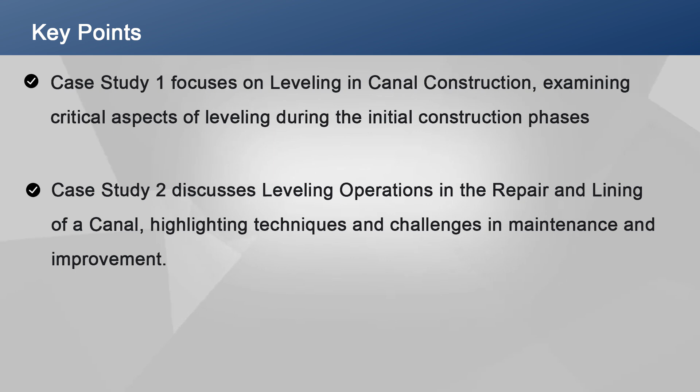The first case study focuses on leveling in canal construction, examining critical aspects of leveling required during the initial phases of construction. The second case study discusses leveling operation in the repair and lining of a canal, highlighting techniques and challenges faced during maintenance and improvement of existing canals. Following these case studies, we will work through an example problem for calculation of earthwork to further understand the practical application of these leveling techniques.

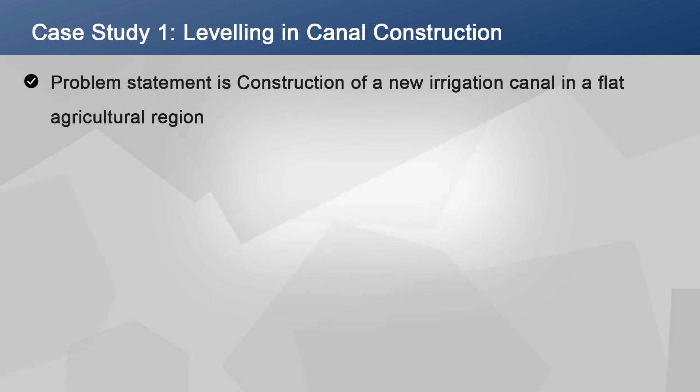Let us start our discussion with case study number 1, leveling in canal construction. What is the problem statement and the objective? The problem statement is construction of a new irrigation canal in a flat agricultural region. The objective is to ensure uniform water flow by maintaining a consistent canal bed slope through precise leveling.

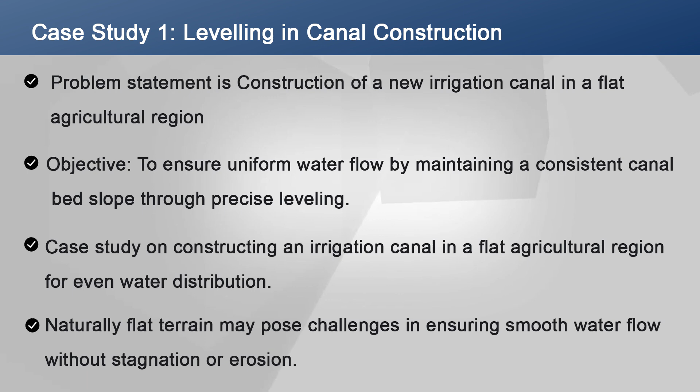In this case study, in a flat agricultural region, an irrigation canal is being constructed to distribute water evenly across farmlands. But if the terrain is naturally flat, it may pose a challenge in ensuring the water flows smoothly without stagnation or erosion. Proper leveling is critical in achieving the desired canal bed slope, necessary for efficient water distribution.

I will repeat this because it is a very important point. Proper leveling is critical in achieving the desired canal bed slope, because if the canal bed slope is not appropriate, water will not flow smoothly.

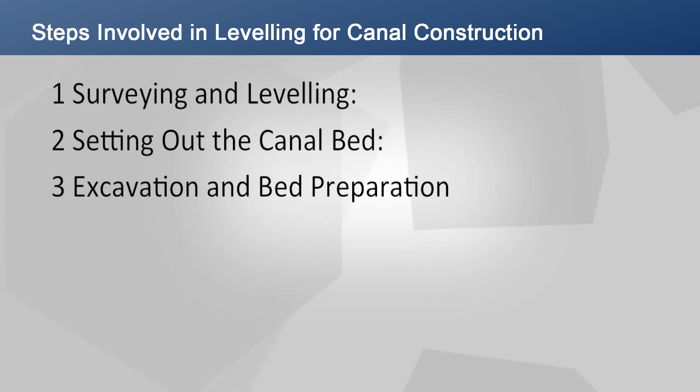What are the steps involved in leveling for canal construction? The first step is surveying and leveling. The second step is setting out the canal bed, and the third step is excavation and bed preparation. We are going to discuss each step one by one.

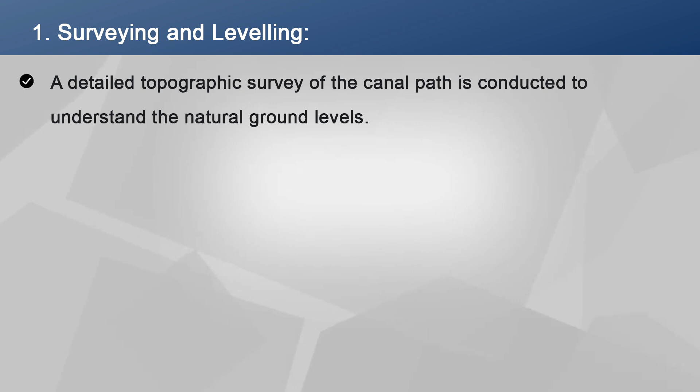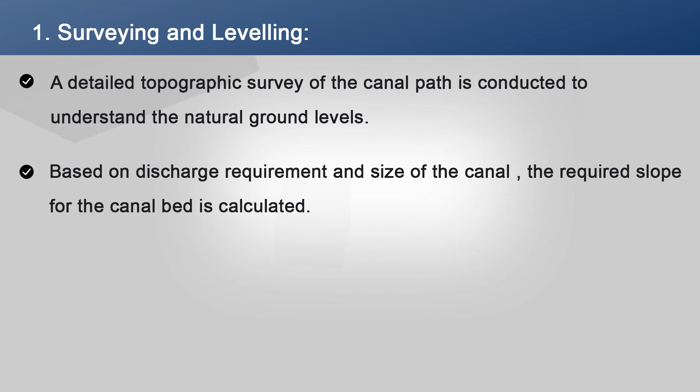The first step is surveying and leveling. A detailed topographic survey of the canal path is conducted to understand the natural ground level, meaning existing ground levels are recorded. Based on discharge requirement and size of the canal, the required slope for the canal bed is calculated.

For example, a gentle slope of 1:2000, which is equal to 0.05%, is often used to ensure the water flows at an optimal speed without causing erosion or silting.

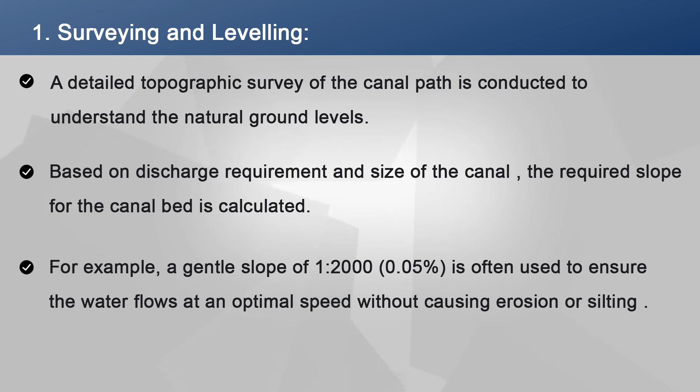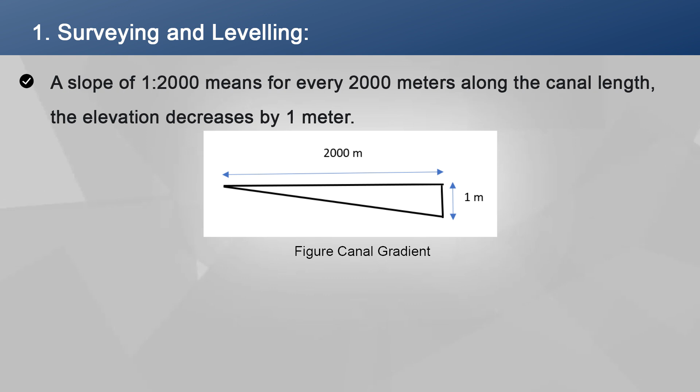So what do you understand by a slope of 1:2000? It means for every 2000 meters along the canal length, the elevation decreases by 1 meter. This downward slope is essential because water naturally flows from a higher level to a lower level. Without this gradient, the water would not flow effectively through the canal.

In mild slope, silting can occur where sediment settles and accumulates in the canal. On the other hand, if water flows at high speed due to a steeper slope, scouring can take place, which can erode the canal bed as well as the bank.

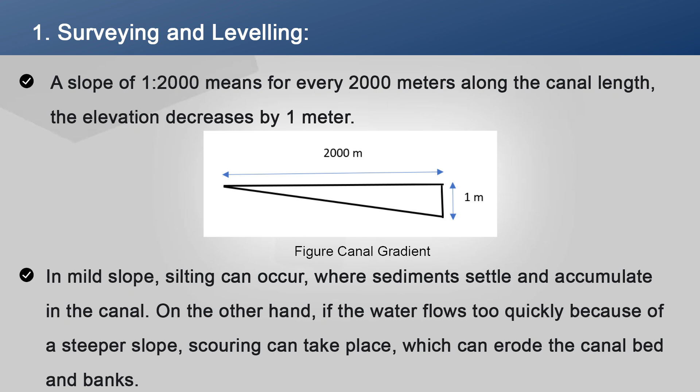You may find silting and scouring to be new terms, so let us take a moment to discuss them. The first term is silting. What is silting? Silting occurs when small particles like sand, silt or mud settle at the bottom of a canal. Over time, these particles pile up, reducing the depth of water and sometimes blocking the flow. You can understand silting by this figure.

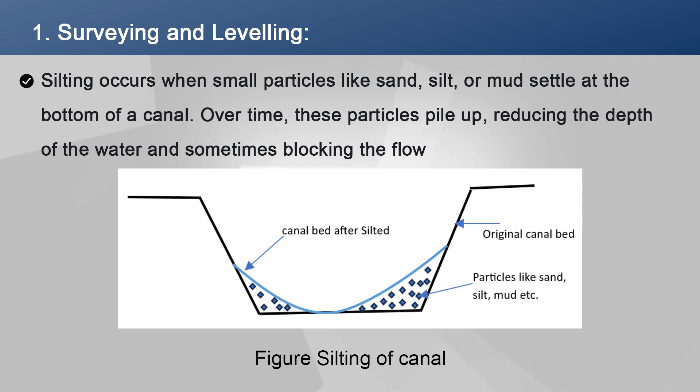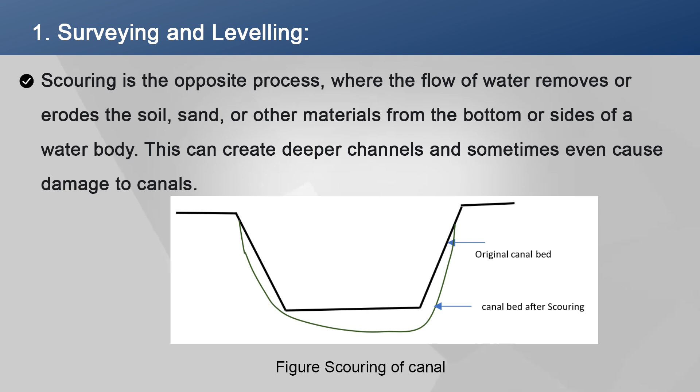Now, what is scouring? Scouring is the opposite phenomenon, where flow of water removes or erodes the soil, sand or other material from the bottom or sides of a water body. This can create a deeper channel and sometimes even cause damage to the canals. You can understand this with this figure.

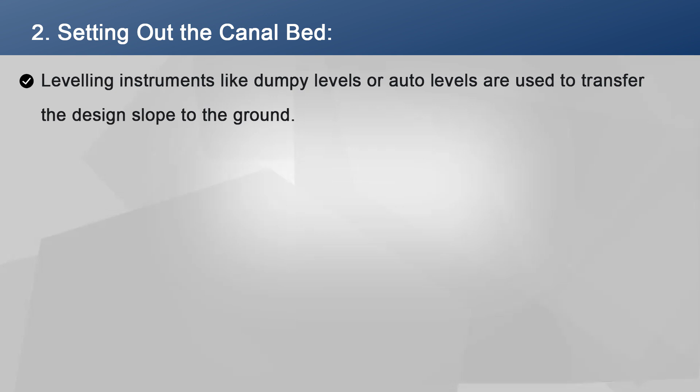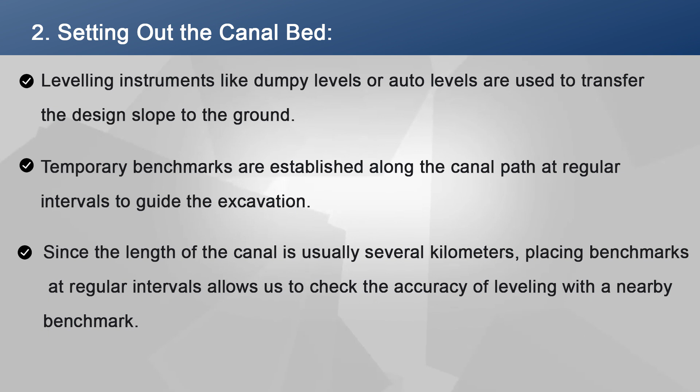Now, the second step is setting out the canal bed. Leveling instruments like dumpy level or auto level are used to transfer the design slope to the ground. Temporary benchmarks are established along the canal path at regular intervals to guide the excavation. Since the length of the canal is usually several kilometers, placing benchmarks at regular intervals allows us to check the accuracy of leveling with a nearby benchmark. This eliminates the need to return to the first benchmark repeatedly.

Now, step number 3 is excavation and bed preparation. The excavation is carried out following level markings given using instruments like auto level and dumpy level, ensuring the canal bed maintains the uniform design slope. This means one person generally keeps instructing the person driving the JCB up to which level excavation is supposed to be done, so that uniform slope of the canal can be maintained.

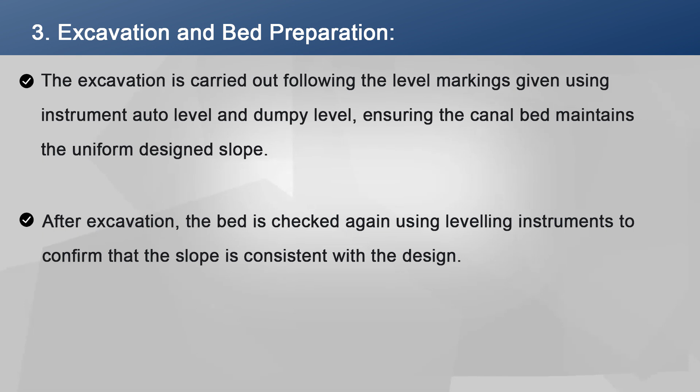After the excavation, the bed is checked again using a leveling instrument to confirm that the slope is consistent with the design. Now we will discuss the importance of precise leveling.

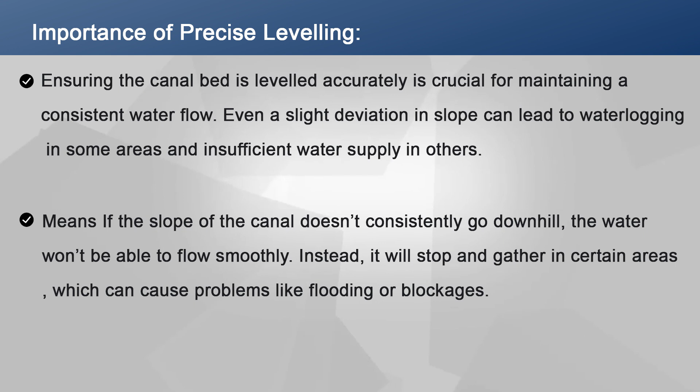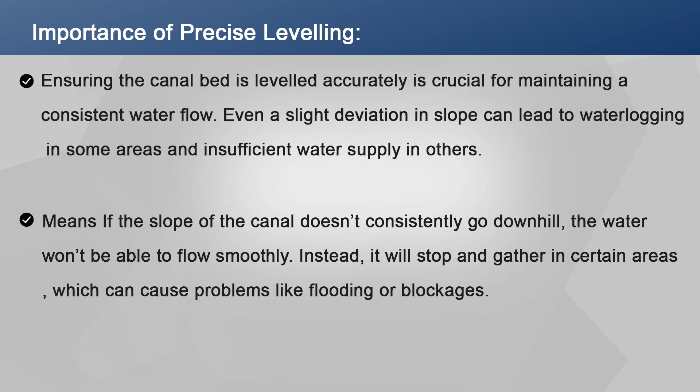Ensuring the canal bed is leveled accurately is crucial for maintaining a consistent water flow. Even a slight deviation in slope can lead to waterlogging in some areas or insufficient water supply in others. If the slope of the canal does not consistently go downhill, the water won't flow smoothly. Instead, it will stop and gather in certain areas, causing problems like flooding or blockages. This is why it is crucial to ensure the slope is uniform throughout the entire canal.

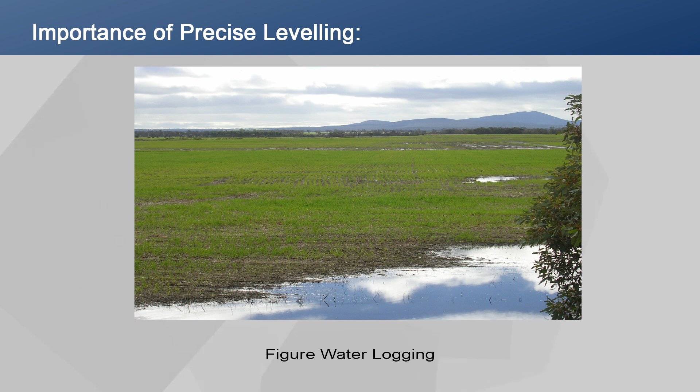Precise leveling also minimizes the risk of erosion, which can weaken the canal structure and lead to costly repairs. If the slope becomes steeper, water will flow at very high velocity and erode the soil.

So after discussing this, what is the outcome of this case study? In this case, the proper application of leveling techniques during construction of the canal ensured that water was distributed evenly across the farmland, improving crop yield and reducing the risk of erosion.

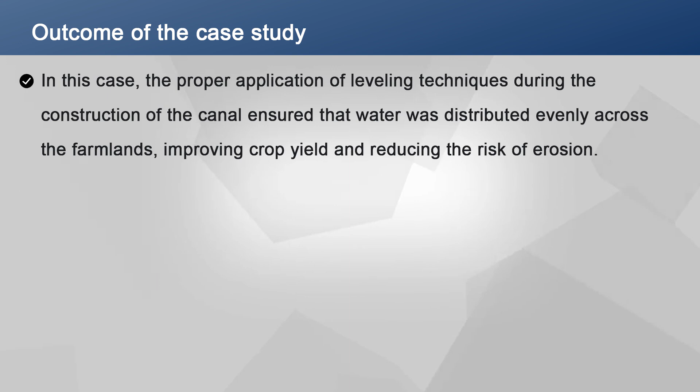Now we are going to discuss case study number 2. What is the problem statement? It is the leveling operation in the repair and lining of a canal. We want to perform repair and lining of an existing canal suffering from water seepage and uneven flow.

What do you understand by lining? Lining of a canal refers to the process of covering the bed and sides of a canal with a protective layer like concrete. You can see in this figure, it is a figure of a lined canal.

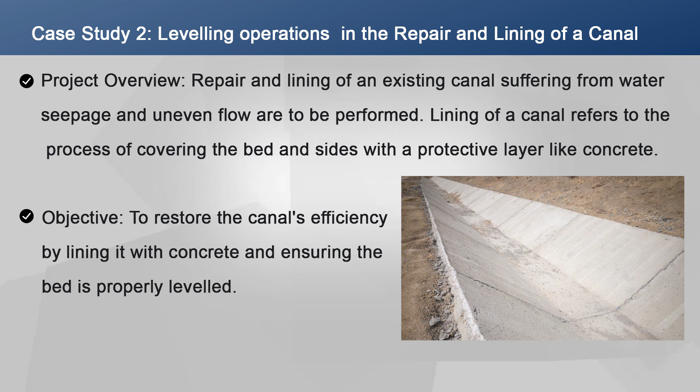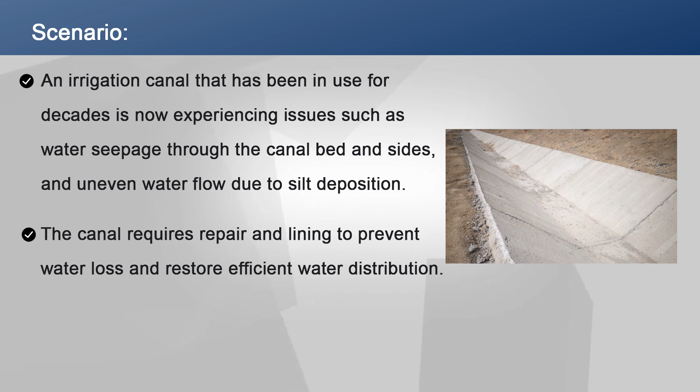What is our objective? Our objective is to restore the canal's efficiency by lining it with concrete and ensuring the bed is properly leveled. Here, an irrigation canal that has been in use for decades is now experiencing issues such as water seepage through the canal bed and sides, and uneven water flow due to silt deposition. The canal requires repair and lining to prevent water loss and restore efficient water distribution.

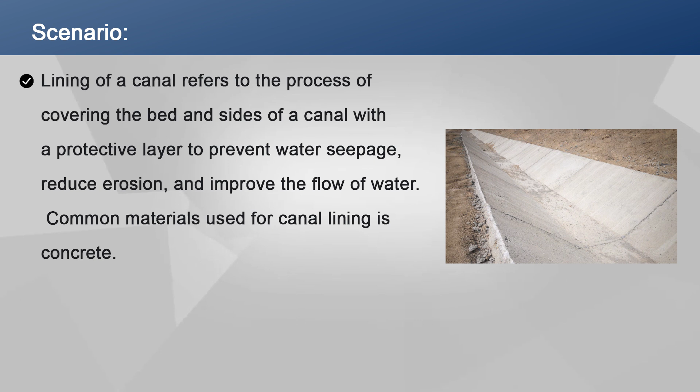Now I want to again highlight the lining of the canal, because this is a very important term in canal repair. Lining of a canal refers to the process of covering the bed and sides of a canal with a protective layer to prevent water seepage, reduce erosion, and improve the flow of water. A common material used for canal lining is concrete.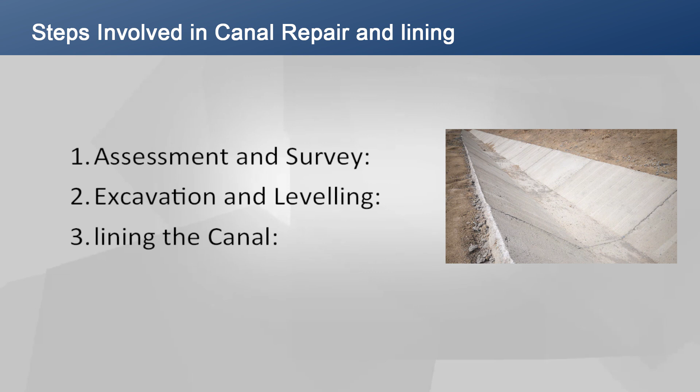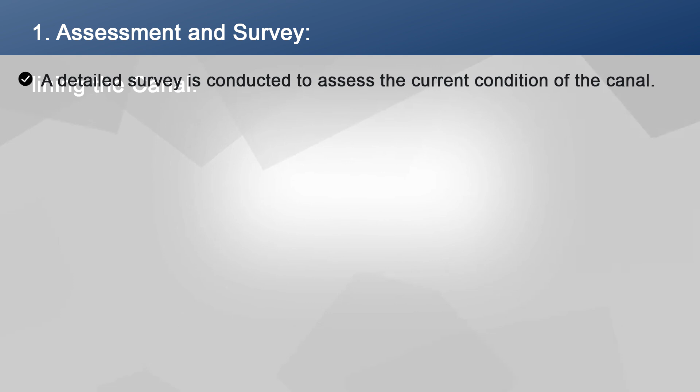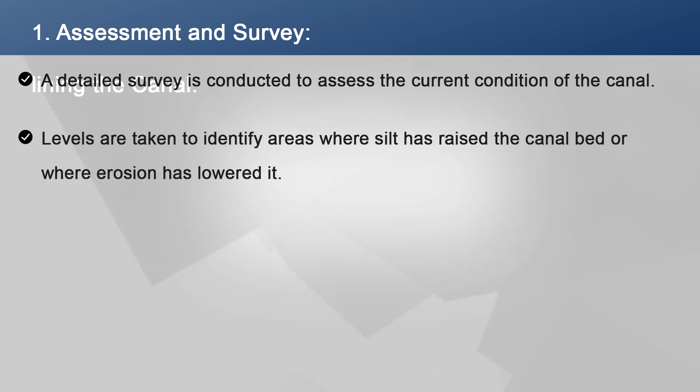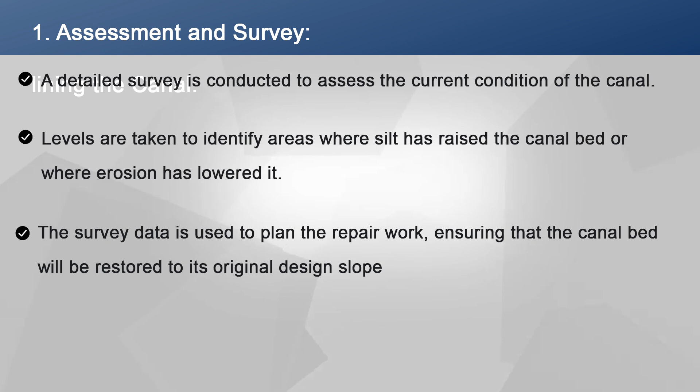Let us discuss the first step: assessment and survey. A detailed survey is conducted to assess the current condition of the canal. Levels are taken to identify areas where silt has raised the canal bed or where erosion has lowered it. The survey data is used to plan the repair work, ensuring the canal bed will be restored to its original design.

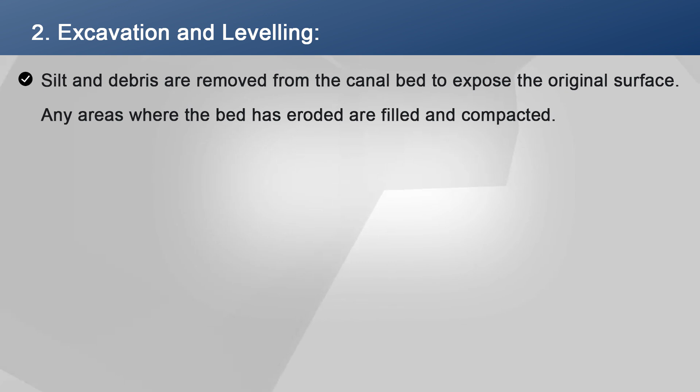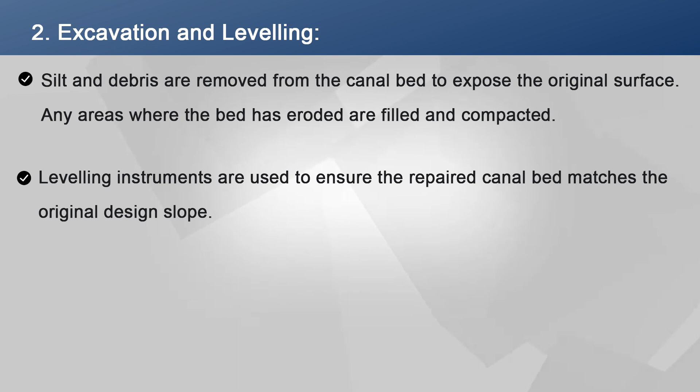The next step is excavation and leveling. Silt and debris are removed from the canal bed to expose the original surface. Any areas where the bed has eroded are filled and compacted. Leveling instruments are used to ensure the repaired canal bed matches the original design slope, which may be like 1:2000 or 1:3000.

Lining the canal: the canal is lined with concrete or other impermeable material to prevent seepage. The lining is applied uniformly following the leveled bed to maintain the desired slope. Regular checks with leveling instruments like auto level and dumpy level ensure that the lining does not alter the canal slope, maintaining consistent water flow.

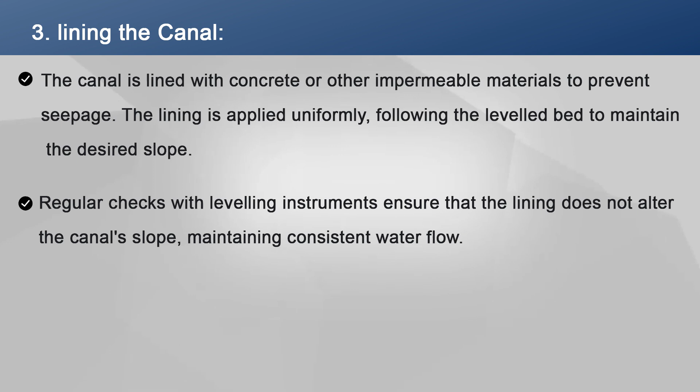Now we will discuss the importance of leveling in lining. Precise leveling during lining ensures the canal retains its design slope, preventing problems such as uneven water distribution or excessive flow velocity that could damage the lining. Leveling also ensures lining is applied evenly, preventing weak spots that could lead to future leaks.

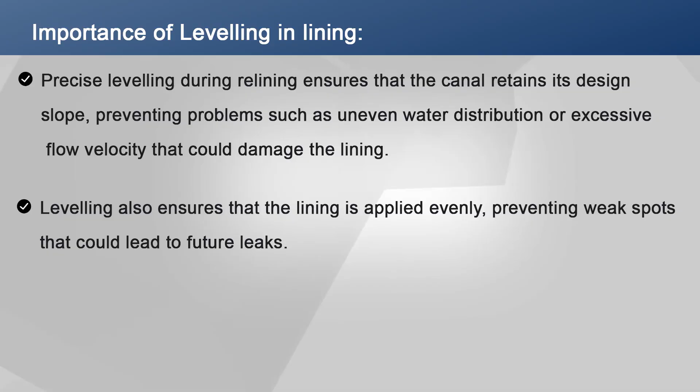So what is the outcome of this case study? By properly leveling the canal bed before and during lining, the canal's efficiency, which had become lower due to seepage and other problems, was restored. Water seepage problems were minimized and water flow became more consistent, leading to better irrigation and reduced maintenance.

So what is the conclusion of this case study? These case studies illustrate the critical role that leveling plays in both the construction and repair of canals. Proper leveling ensures that the canal functions efficiently, with water flowing at the desired speed and distribution, minimizing issues like erosion, seepage, and uneven water delivery. By using leveling techniques accurately, engineers can ensure the longevity and effectiveness of the canal system.

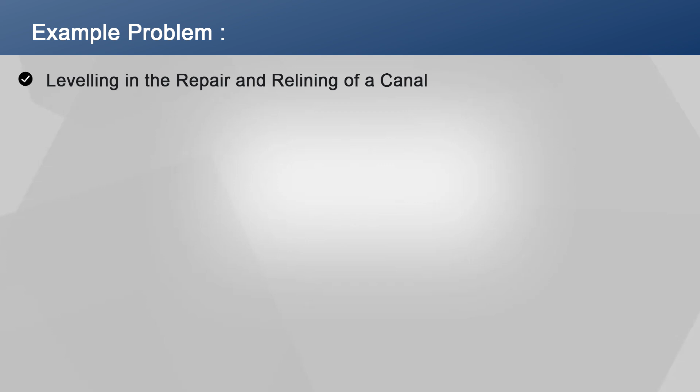Now we are going to discuss an example problem, which is leveling in repair and relining of a canal.

So, what is the problem statement? The problem statement is repair and lining of a 500-meter section of an existing irrigation canal with a bed width of 2 meters. The canal was originally designed with a gentle slope of 0.05%.

Now, what is the objective? The objective is to restore canal efficiency by ensuring the canal bed is leveled correctly and lining it with concrete to prevent the seepage problem.

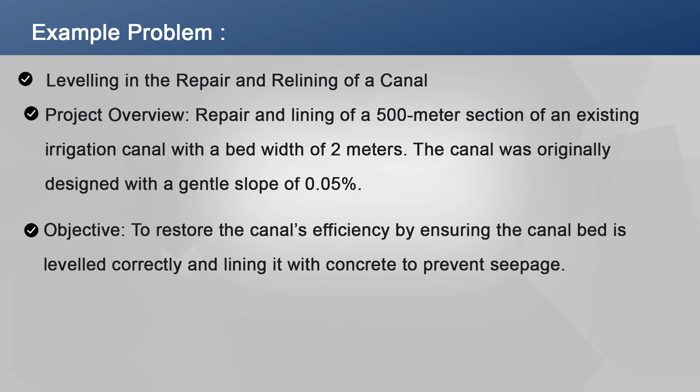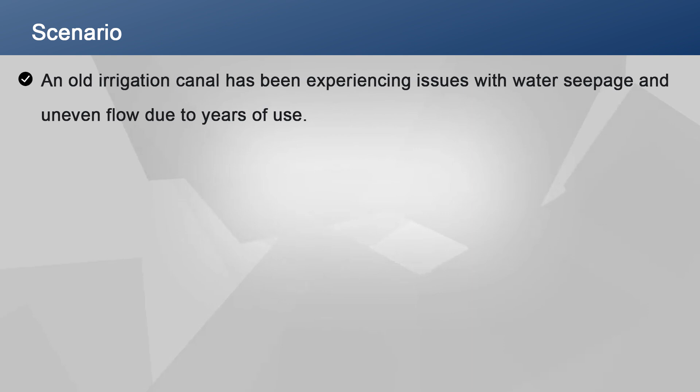The scenario is an old irrigation canal has been experiencing issues with water seepage and uneven flow due to years of use. The canal bed has accumulated silt in some areas, causing an uneven slope, while erosion has worn away the soil, creating uneven areas where ground has sunken, forming low spots in others.

Now, what is our goal here? Our goal is to re-level the canal bed and line it with concrete to restore its original functionality.

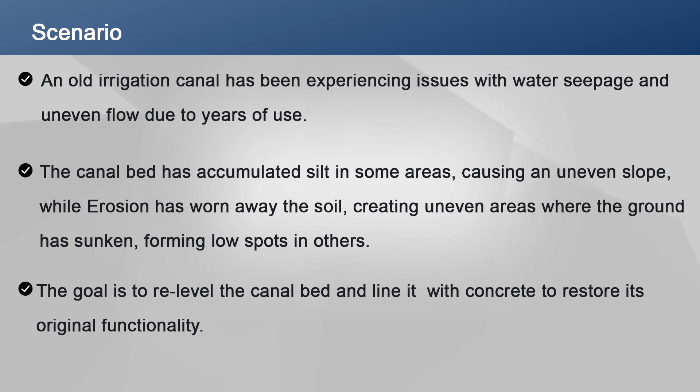We will deal with this case study step by step. First is assessment and survey. Second is excavation and leveling. Third is volume of earthwork calculation. Fourth is lining the canal, and fifth is final checks and leveling.

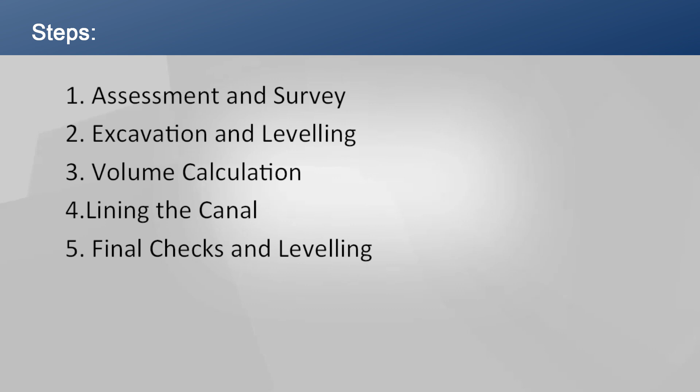So, what is the original design slope? The canal was originally designed with a gentle slope of 0.05%, which means 0.0005 meter per meter. What does it denote? It means for every 100 meter length of the canal bed, elevation drops by 0.05 meter, or we can say 5 centimeter, as you can see in this figure.

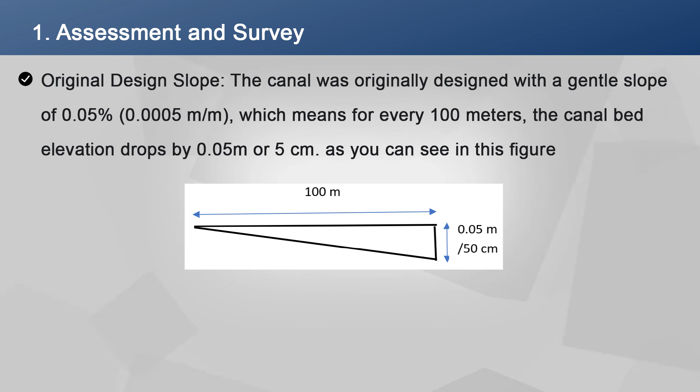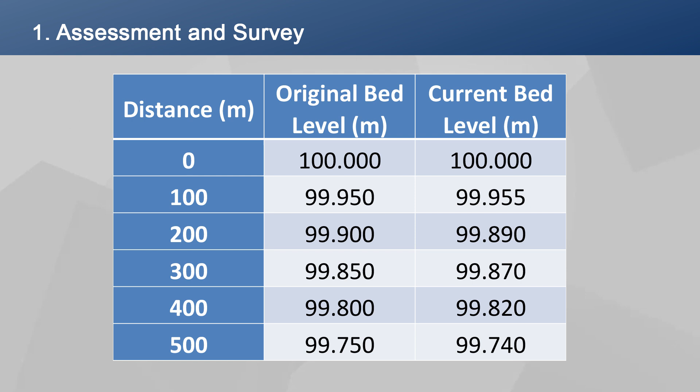Second step is excavation and leveling. Based on the survey data as shown in the table, the following observations can be made. At the 0 meter section, original bed level and current bed level are same, so there is no cutting or filling required, whereas at the 100 meter section, the current bed is slightly higher than the design level.

By 0.005 meters. At the 200 meter section, the actual bed is lower than design level by 0.01 meter or 10 mm. So, it needs to be filled and compacted to raise it to the design level.

What is the observation at the 300 meter section? The bed is slightly higher by 0.02 meter or 20 mm, requiring cutting to reach the design level. What is the observation at 400 meter? The bed is higher by 0.02 meter or 20 mm, requiring cutting to reach the design level.

What is the observation at the 500 meter section? The bed level is 0.01 meter below the design level, requiring a small amount of fill.

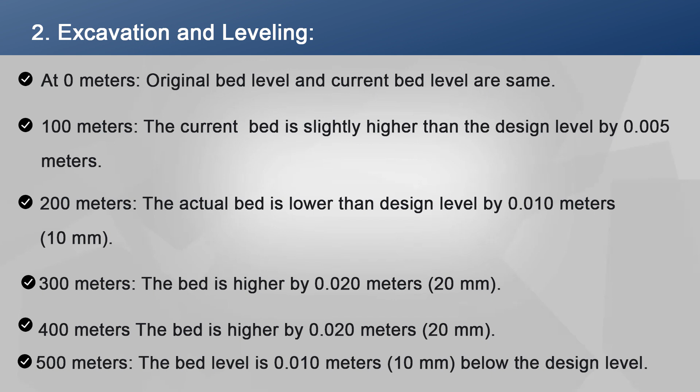Now, in the calculation of earthwork for this canal, we must understand the basic assumption. It is assumed that the cross section of the canal remains the same for half of the distance between each pair of sections on either side of the section being analyzed. I will repeat, because this is a very important assumption: the cross sectional area of the canal remains the same for half the distance between each pair of sections on either side of the section being analyzed.

This assumption helps in calculating the volume of earthwork needed. If you are finding it difficult to understand, this figure may help clarify the concept. In this case, the canal is 500 meters long and cross section details, meaning current bed level, are available at every 100 meters, which means bed level data is available at a total of 6 points along the canal length. We assume that the canal's cross section shape stays the same for half the distance between each pair of sections on both sides.

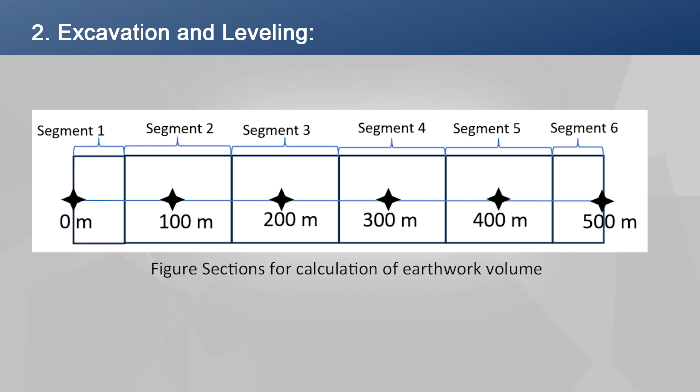Now, we will discuss volume calculations. Here, for the volume calculation, width of the canal bed is required, so it is given that the canal bed is 2 meters wide.

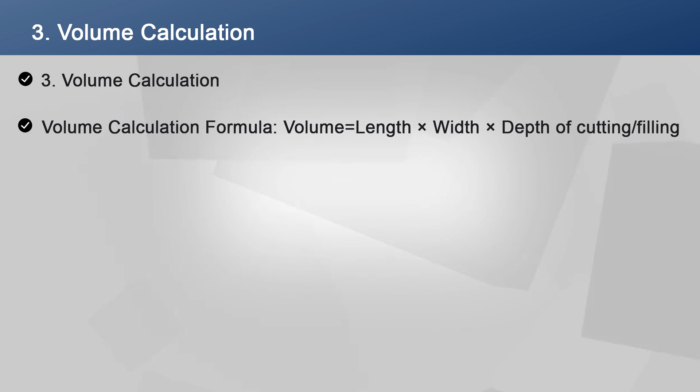Volume of earthwork can be calculated by this formula: volume equals length into width into depth of cutting or filling. Let us calculate volume of cutting and filling for each segment.

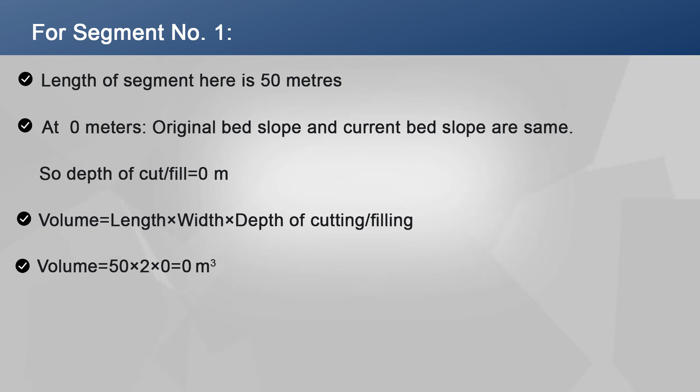For segment number 1, it is assumed that the cross sectional shape at 0 meter remains constant throughout the length of this segment, which is 50 meters. At 0 meter, original bed level and current bed levels are same, so depth of cutting or filling is 0 meter. Volume equals length into width into depth: 50 meters into 2 meter into 0 meter. So volume of earthwork comes out to be 0 cubic meter for segment number 1.

For segment number 2, it is assumed that the cross sectional shape at 100 meters remains constant throughout the length of this segment. At 100 meter, the current bed level is higher than design level by 0.005 meters or 5 mm, so 5 mm cutting will be done. Volume of cutting equals 100 meter into 2 meter into 0.005 meter, which comes out to be 1 cubic meter cutting volume.

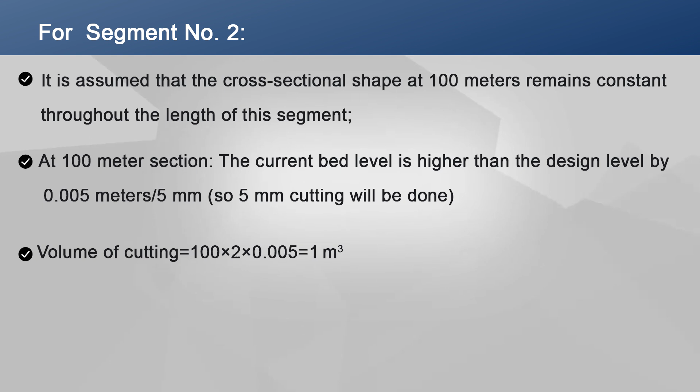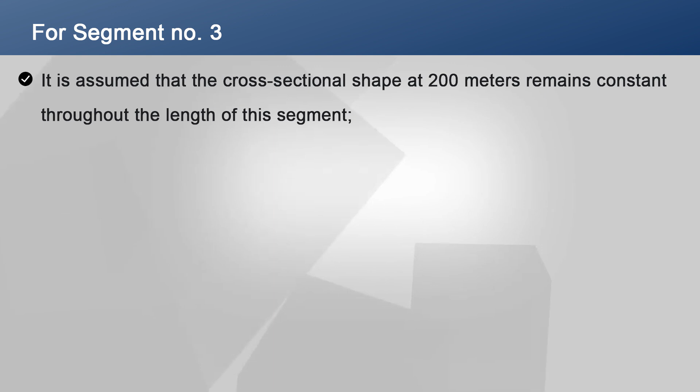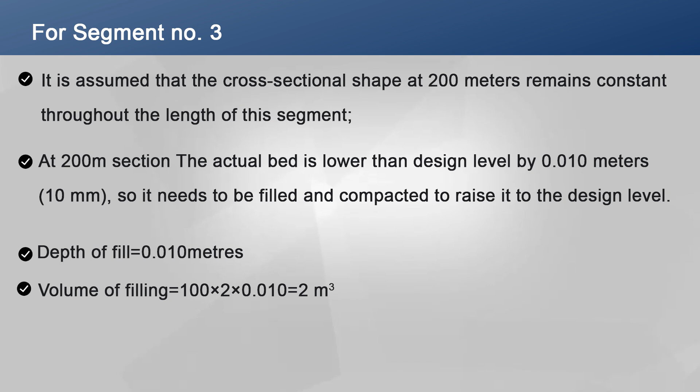For segment number 3, it is assumed that the cross sectional shape at 200 meters remains constant throughout the length of this segment. At 200 meter section, the actual bed is lower than design level by 0.01 meters or 10 mm, so it needs to be filled and compacted to raise it to the design level. Depth of fill is 0.01 meter. Volume of filling equals 100 meters into 2 meters into 0.01 meter, which gives us the volume of filling as 2 cubic meter.

For segment number 4, it is assumed that the cross sectional shape at 300 meter section remains constant throughout the length of this segment. At 300 meter section, the bed level is higher by 0.02 meters or 20 mm, so it requires 0.02 meter cutting to reach the design level. Volume of cutting equals 100 meters into 2 meters into 0.02 meters. After solving, we get volume of cutting as 4 cubic meters.

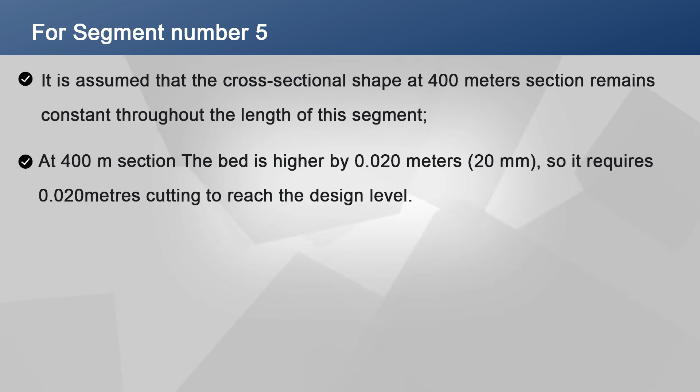For segment number 5, it is assumed that cross sectional shape at 400 meter section remains constant throughout the length of this segment. At 400 meter section, the bed is higher by 0.02 meters or 20 mm, so it requires 0.02 meter cutting to reach the design level. Volume of cutting equals 100 meters by 2 meters by 0.02 meter. After solving, we get volume of cutting as 4 cubic meter.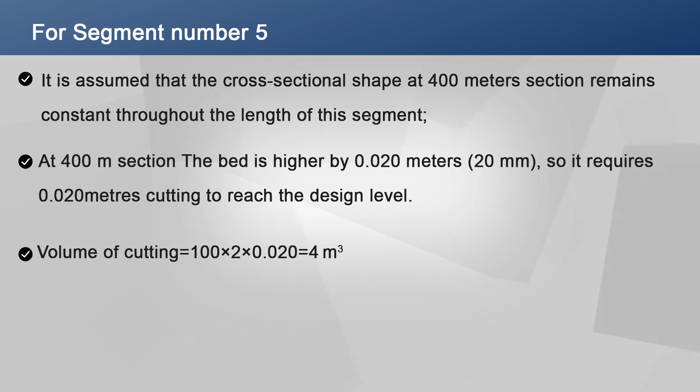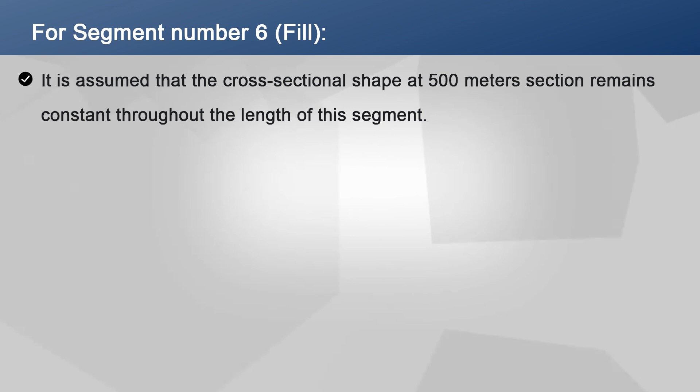For segment number 6, the last segment, it is assumed that the cross sectional shape at 500 meter section remains constant throughout the length of this segment. At 500 meter section, the bed level is 0.01 meter or 10 mm below the design level, so it requires a small amount of filling. Volume of filling equals length into width into depth of filling. Length here is 50 meters since this is the end segment, width is 2 meter, depth of fill is 0.01 meter. After solving, we get volume of filling as 1 cubic meter.

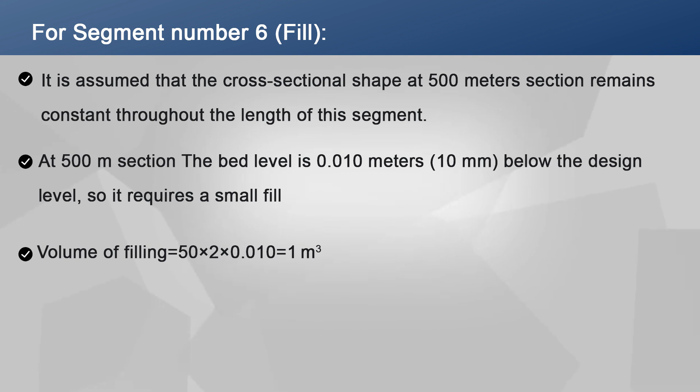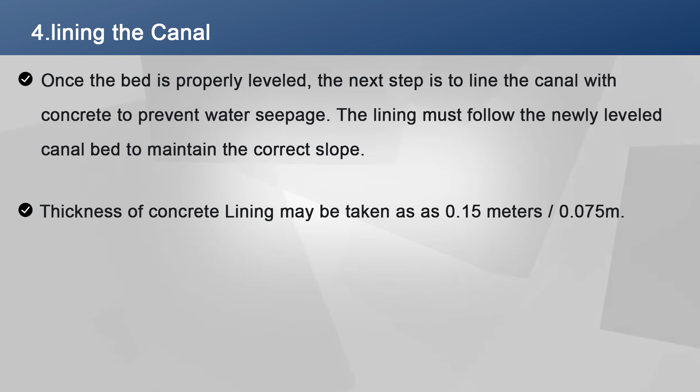Now we will discuss lining of the canal. Once the canal bed is properly leveled, the next step is to line the canal with concrete to prevent water seepage. The lining must follow the newly leveled canal bed to maintain the correct slope. The thickness of concrete lining may be taken as 0.15 meters or 150 mm, or it may be taken as 0.075 meter or 75 mm.

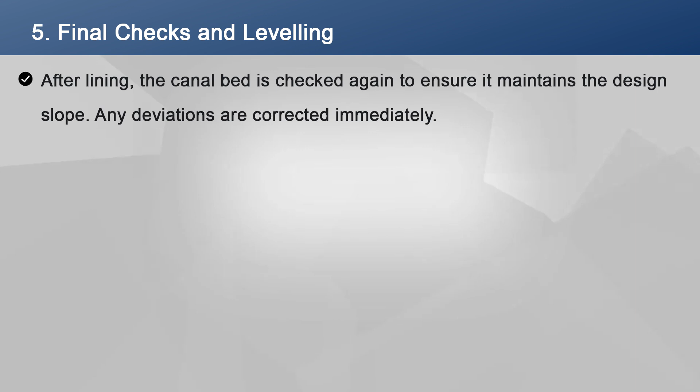Now we will discuss final checks and leveling. After lining, the canal bed is checked again to ensure it maintains the design slope. Any deviations are corrected immediately.

So what is the conclusion of this example problem? By following precise leveling and lining practices, the canal was successfully restored to its original functionality. The water flows efficiently, reducing the risk of seepage and ensuring consistent delivery to the irrigation network.